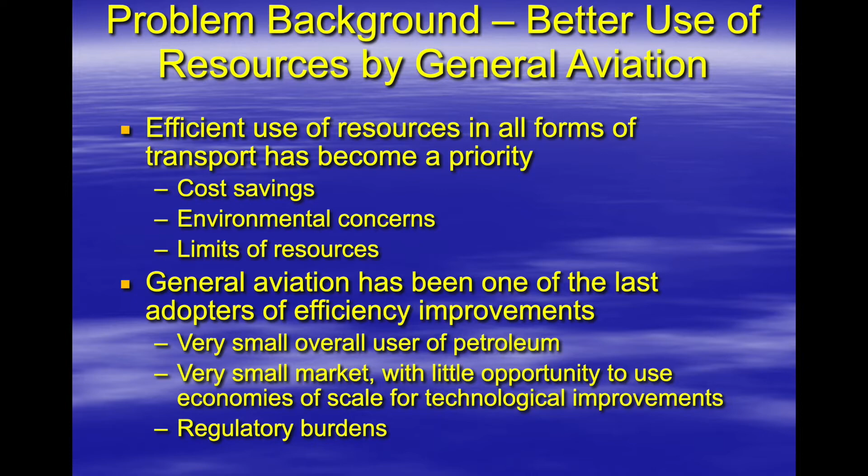Here's the issue I wanted to look at with this project: better use of resources by general aviation. Efficient use of resources in all forms of transportation is a priority, for reasons like cost savings primarily. General aviation, as a rule, hasn't been a big adopter of efficiency improvements. There's not as much of a concern - we really don't use that much petroleum. This market's real small, and there's pretty high regulatory burden, so there's some roadblocks to efficiency.

But there are some more efficient airplane engines being worked on at this time. A couple of them, the diesel engines you're seeing coming out of airplanes like the Diamond Twin Star - that's a compression ignition or diesel engine. The interesting thing on the engines for this particular airplane, they're about 170 horsepower, so they're kind of heavy. They're quite a bit heavier than an O-360. But the real deal on these is the specific fuel consumption, 0.38 pounds per horsepower-hour - that's pretty good compared to a gasoline engine, which is about 0.48, and they can even be higher than that, 0.55 or so.

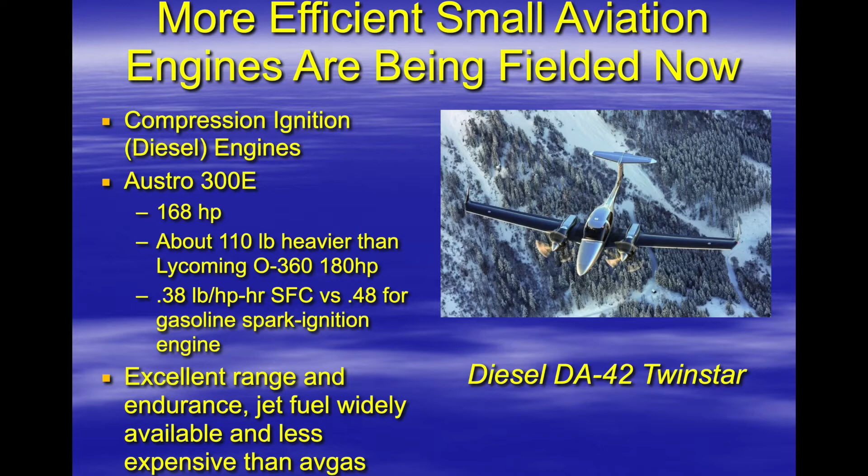Turboprop engines can be more like 0.6 and higher. So these diesels are very frugal, they have real good range, and the jet fuel, if you bought that, is a little bit less expensive than aviation gasoline. So that's a real efficient engine.

And there's some other really neat things coming down the pike - electric engines for airplanes. They'll be fielded in the future, but there are many ongoing efforts to test right now. This picture here is the MagniX E-Caravan. It just flew a few months ago at Moses Lake, Washington - that's the airport there in the background.

The neat thing about these electric motors is they have a very high conversion efficiency for the engine. The amount of energy you're carrying, about 80% of it gets converted into power coming out of the electric motor. But the real deal is that the batteries are still really heavy for the amount of electricity they hold. A gallon of gasoline has about 34 kilowatts of electricity if you do a direct comparison. But batteries that can hold 34 kilowatts of power are about 60 to 80 or 100 pounds or more - it's like 100 pounds a gallon. You get real good conversion efficiency, but the range is not quite there yet.

We're going to see some big improvements on that because the battery industry is extremely competitive, and they're really driving to get the battery energy density up and the weights down, and we're seeing some neat changes in that. So range is still an issue, of course, but they'll eventually get that.

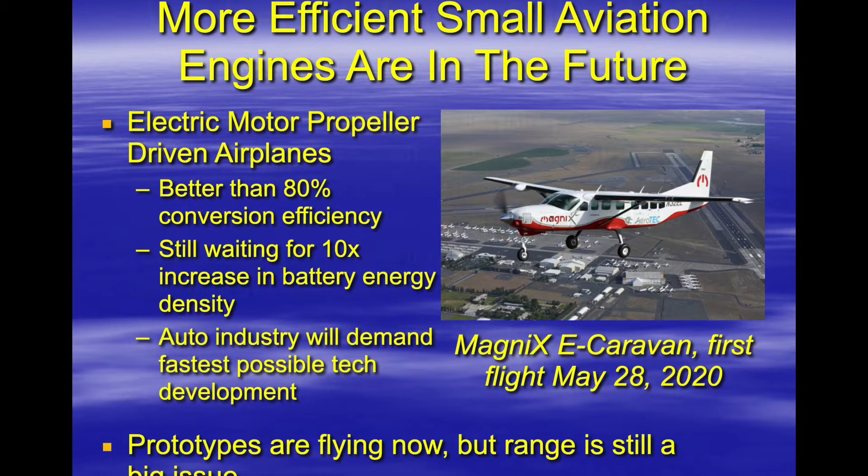But regardless of the propulsion engine type, you still have an engine providing torque into a propeller and providing thrust and power to an airframe. And you really need to be efficient to be able to fly these efficient airplanes - efficient pilots. There are some flying and flight planning techniques that can get better efficiency out of your airplanes in the future, and you can do it right now in your own airplane. It doesn't cost you anything. And here we go - here's how you do it.

So first of all, when you're talking about efficiency, what is that? People tend to think that efficiency is miles per gallon. They really only look at the fuel side, but there's more to it than that. Is speed a factor? That is the question.

And you fly max range, max endurance. Where's the balance there? So there was a great paper done by Gabrielli and von Karman back in the 50s, called 'What Price Speed.' This little graphic here is from that paper. The bottom line is that speed has value.

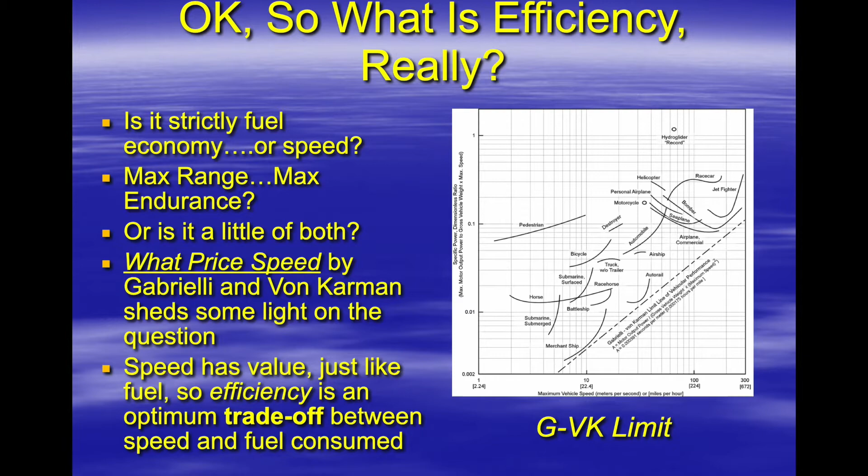Speed has value because of the value of time. So we actually put a value on speed, just like fuel. Efficiency, as opposed to sustainability, is an optimum trade-off between the speed you get and the fuel that you use. Like many engineering things, there are trade-offs there. So that's what efficiency really is.

And using those concepts, a fellow named B.H. Carson published a paper in 1980 called Fuel Efficiency of Small Aircraft. This is an AIAA paper. If you look at the chart here, a lot of you folks have seen this. The upper one is a power versus speed chart, maximum endurance at the bottom of the curve, and maximum range where the curve touches the line coming from the origin. So maximum endurance, maximum range.

Now, if you change the y-axis a little bit here and put that into thrust instead of power, you can do a very similar sort of graphical determination there. Maximum endurance is still at the same speed. Maximum range now actually comes at the bottom of the curve, as you can see. And that tangent line is now called the optimum cruise, and that was called Carson's speed.

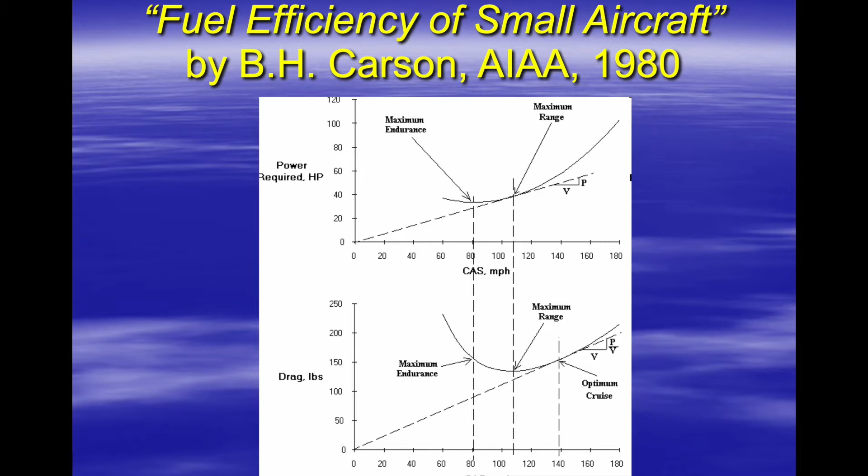There's another look at it here in a little bit larger view, and these numbers will be relevant a little bit later. Again, you have the drag or the thrust there - it's not power on the y-axis, it's thrust as a force, and then your speed. Best rate of climb, roughly, maximum range there, 95 knots or so, and then the Carson speed there, again, is about 123, 124 knots or so. Again, that tangent line goes down to the origin - it's not shown on the graph here because we wanted to zoom in a little bit.

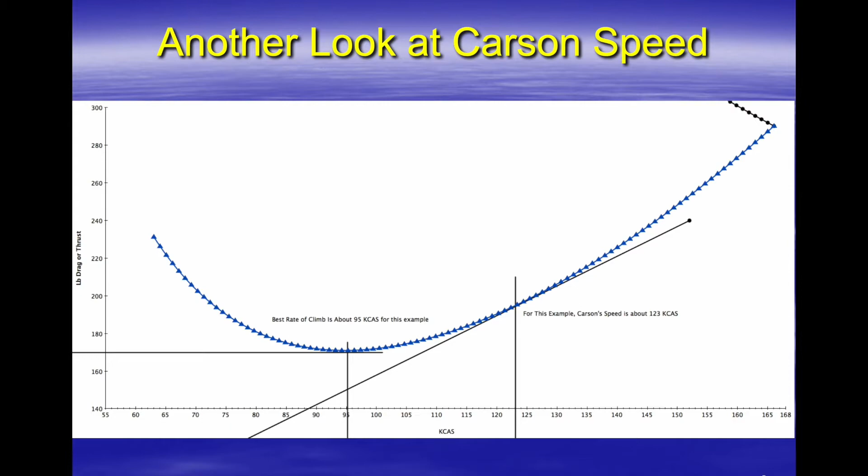So Carson's speed is basically the instantaneous airspeed where the product of your velocity and your miles per gallon are maximized. Again, these are trade-offs. As speed goes up, miles per gallon goes down eventually, at least on the front side of the power curve. And if you maximize that expression - speed times miles per gallon - that's Carson's speed. He called it the least wasteful way of wasting fuel.

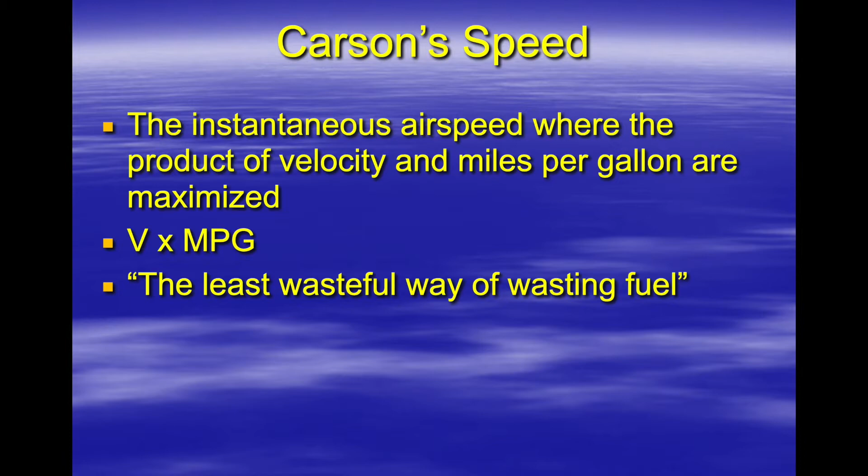There's some other interesting relationships if you do this mathematically, when you raise a value to an exponent. So if you take v to the -1, which would be maximizing miles per gallon divided by velocity, if you maximize that, that's your maximum endurance speed. If you maximize v to the 0, which is 1, which is maximized miles per gallon, that's maximum range, obviously. And that's kind of close to vy, your best rate of climb, roughly.

It's kind of rough - Carson's speed is about 1.3 times your vy speed, roughly. Again, that's v to the 1, or v times miles per gallon - you maximize that. If you maximize the product of velocity squared times miles per gallon, basically that's as fast as you can go, because that square term is very powerful mathematically. So those are the relationships there for those of you who like to see that.

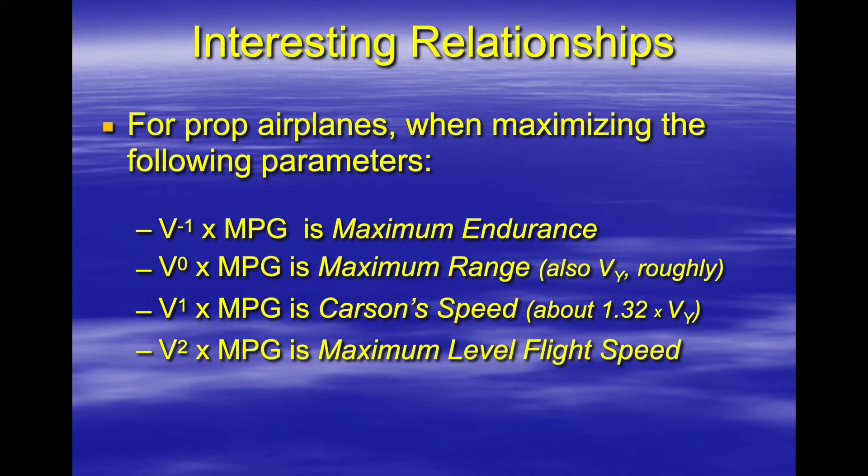But guess what? Most of you probably have never even heard of Carson's speed. And the reason for this is even though this paper was published in 1980, this concept really hasn't caught on. A few people talk about it in some of the various forums. But the real issue here is that when you cruise at this speed, you're only using about maybe 50 to 55% of the power in the airplane. And the winds can overwhelm that for long cross country planning, and your specific fuel consumption.

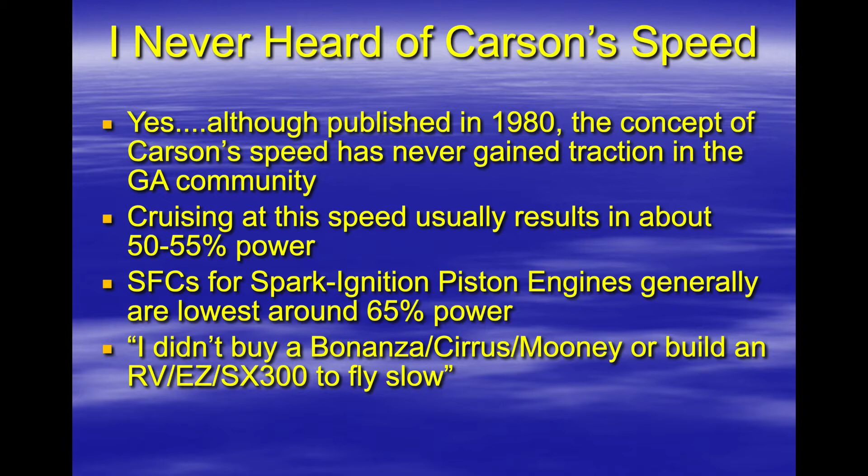Remember, I talked about that earlier - for regular spark ignition piston engines, as opposed to compression engines like diesel, specific fuel consumption is a little bit lower when you're around 65% power. So if you're looking for good specific fuel consumption, again in a no-wind scenario, about 65% power is actually where your best specific fuel consumption comes in. And of course, people will say, I didn't buy a Bonanza or a Cirrus or a Mooney or build an RV or an SX300 or EZ type to go slow. So this really hasn't caught on all that much in the community.

So maybe Carson's speed for cruise isn't the greatest measure of efficiency, and we would want to look at this little exponent thing, this v to the 1 by mpg. If you maximize that, you get basically lower than desired cruise power because it doesn't work well in the real world.

So the CAFE Foundation, the Comparative Aircraft Flight Efficiency Foundation, if you recall, was formed in the early 1980s by Dr. Brien Seeley out in California. They ran a whole series of efficiency air races and did a bunch of other flight research, and they spent a long time thinking about this efficiency issue.

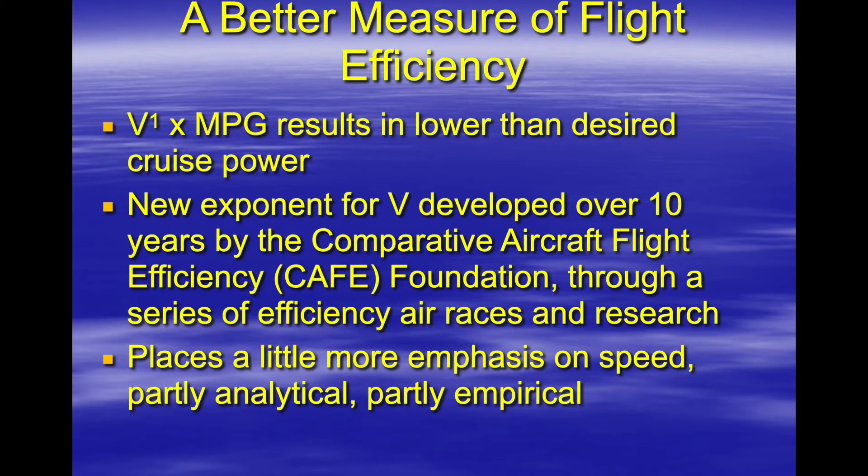And they came up with a different exponent for this velocity term, basically that put a little bit more emphasis on speed. There's a real long derivation of it. I won't bother you with it, but part of this is analytical, part empirical. Anyway, so here it is.

So the CAFE parameter, when you're looking at the efficiency of an airplane, the number you want to maximize is your velocity made good, raised to the 1.3 power, times miles per gallon. So this is like the measurand, the measurand of efficiency. If you can maximize your CAFE parameter, that's your best efficiency.

And the reason you use velocity made good is that's the actual speed that you get between your departure and your destination, because that's really what counts, point to point. Instantaneous velocity is nice for theoretical people, but we're flying airplanes to go from point A to point B a lot of times, and so velocity made good is a better term here, and it allows you to evaluate a flight for non-constant true airspeed, and it also allows you to evaluate a flight for winds.

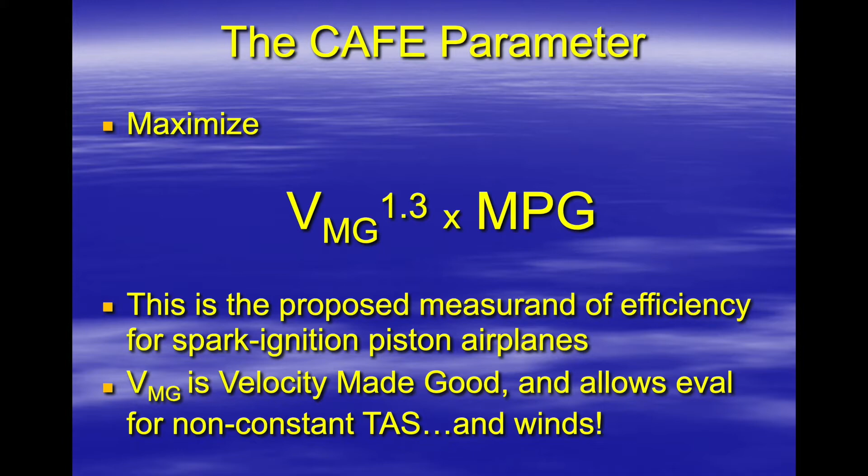Because as I said before, flight planning for your cruise has a huge impact on the overall efficiency of your flight. So Carson's speed still has merit, though, but not really as much as a cruise speed.

My idea to come up with this for my master's thesis started from this book here, Logic of Flight, by Jack Norris. He talked a lot about cruising at Carson speed, and again, we've shown that that's maybe a little bit too slow. He also talked a little bit about climbing at Carson speed, but he said basically climb until the airplane won't climb anymore. And he also didn't discuss really any considerations for cross-country planning with respect to winds.

And there's all that really needs to get into the thought process. So when you're flying at Carson speed, you're using about 50 to 55% power for moving forward, as I said before, but then you use all the rest of your power for climb. And you don't want to fly this 25 squared thing.

People get taught about that. I'm going to show you later on that just really is hard. It hurts your efficiency, and I'll show you that here in a little bit.

So, rather than climbing until the airplane doesn't climb anymore, what I thought I would do is put a performance limit on there and actually make this climb a profile instead of just a constant speed. And this is similar to what we see in some of the larger airplanes.

And the nice thing about changing your profile when the airplane reaches a climb performance limit is that the airplane tells you when you need to make a little change in your climb profile. You don't have to do any computations for different weights, or if it's hot or cold, or if you have winds or any of that sort of thing. That's different from what Norris did, and added quite a bit to the definition.

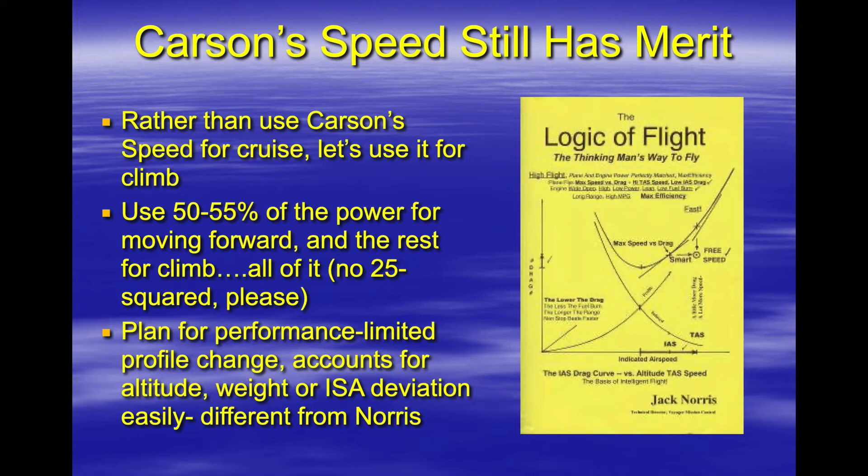So as you recall from your training, there's a couple of FAA-defined V-speeds. VX, of course, is the best angle of climb, and that's the best climb that you get when you're flying your airplane to go forward. And VY is best rate of climb, that's the best climb per unit time. So time, distance based for the first one, time based on for the second one.

So now, logically, we would go to VZ. VZ is currently an unassigned term in FAA vernacular, and so I claimed it in this paper in order to represent the best efficiency of climb. So it's a climb profile, it's not really a constant speed, and here's how you do it.

VZ is about 1.3 times your VY at your maximum continuous rated power. No 25 square, as much as you can get out of the airplane in its certification basis, that's what you use. And now here's where the performance limit comes in. You climb at this speed until the airplane will not climb any faster than 500 feet per minute. So then you change from a constant speed climb to a constant vertical velocity climb.

So you maintain 500 feet per minute climb. While you're doing that, the speed's going to slowly decrease a little bit. And then when the speed gets to whatever your VY speed would be for that altitude, you just maintain your VY and climb at that. So it's a profile instead of a constant speed.

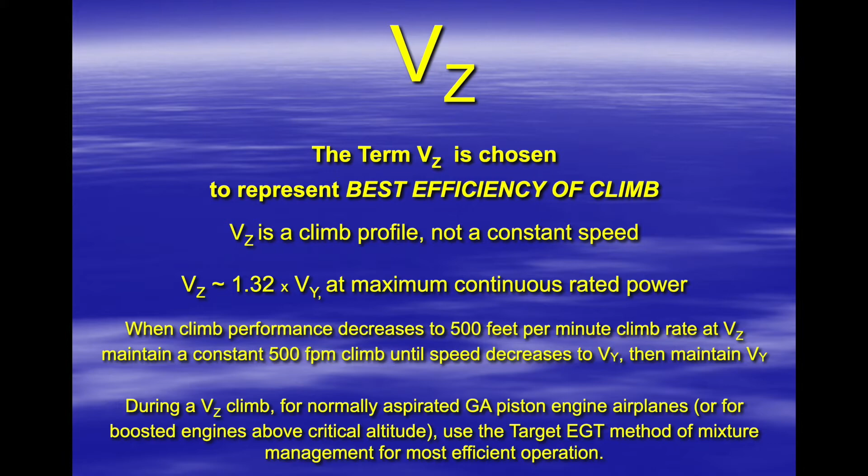But it doesn't really make any difference there. There have to be three things that have to work for this to actually be a useful term. One of them is technically rigorous, so it really is the most efficient climb, and you use the CAFE parameter that I talked about before to evaluate that climb. And then can you define this climb in regulatory language? And then can it really be flown by ordinary pilots?

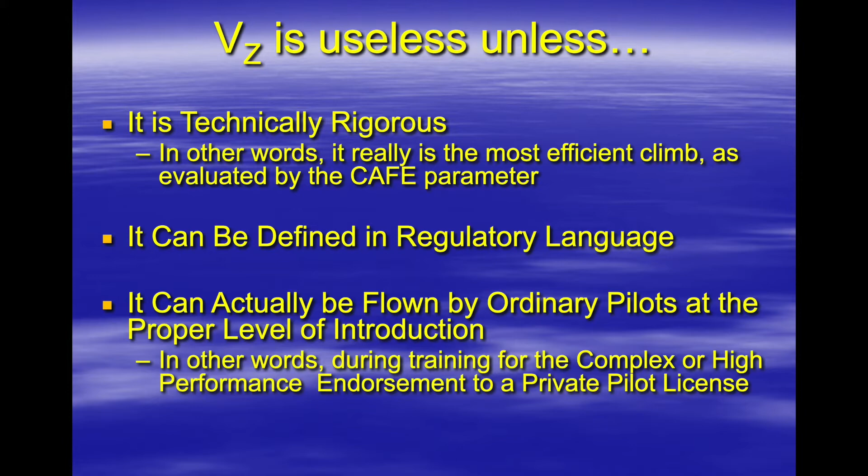The idea for this is you would introduce VZ in flight training at the time that you're going to get your complex or high performance endorsement for a private pilot license. So the difficulty of this particular maneuver has to aim at that population. So that's the idea there. So we need to satisfy all three of these things for this to actually be a viable concept.

And when I was working on this project, this was where I really ran into some problems, because it'd be nice to have a computer model or simulation of airplane performance that could account for this profile change. And the more I looked into it, the more discouraged I got, because it was a very difficult modeling problem. Charts don't really work. Even some spreadsheets that I'd seen didn't really account very well for propeller performance and efficiency.

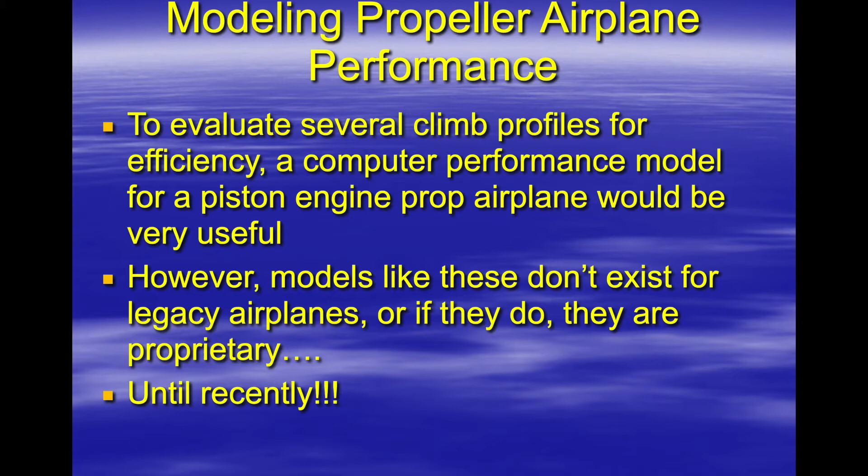So Benchmark was written by Alfred Scott. He's the president of Sequoia Aircraft Company, the guys that came up with the Falco airplane, as well as the Sequoia, which was a kit built similar to the Falco. A couple of consultants on this program, Finn and Dorothy Taylor, are legendary in flight test circles. They were the primary flight leads on Mooney, working with Roy LoPresti back in the 70s, doing flight tests. Huge history. They're giants in the industry.

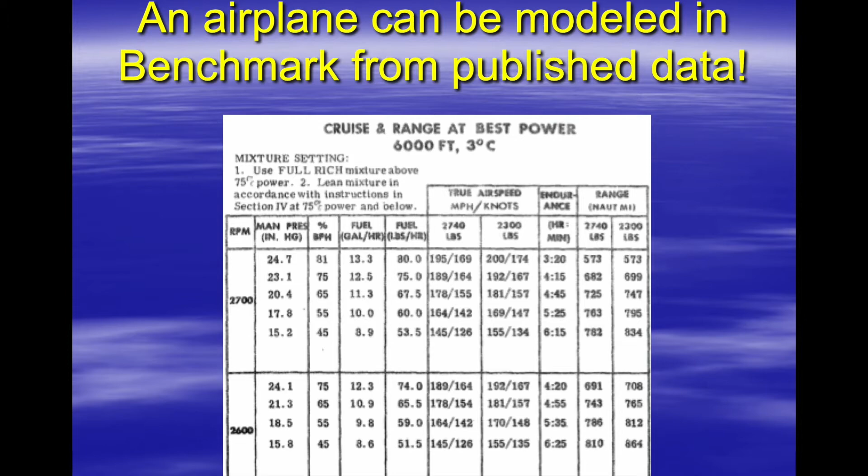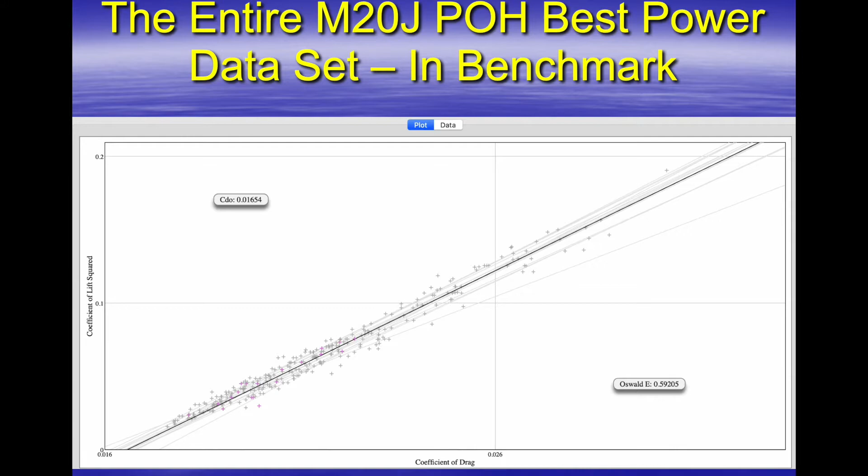So when you look at the numbers here for Mooney, they sort of map over to RV roughly in terms of performance and results. Here's all these numbers, and people normally don't look at all this, but I grabbed all of them. In fact, the entire Pilot Operating Handbook, every line of data, I put into Benchmark, and all those little pluses are a line from the POH that have been put into Benchmark, resulting in a drag and lift curve that you can use to predict performance. The line there is the best fit to the data, and that was a lot of work.

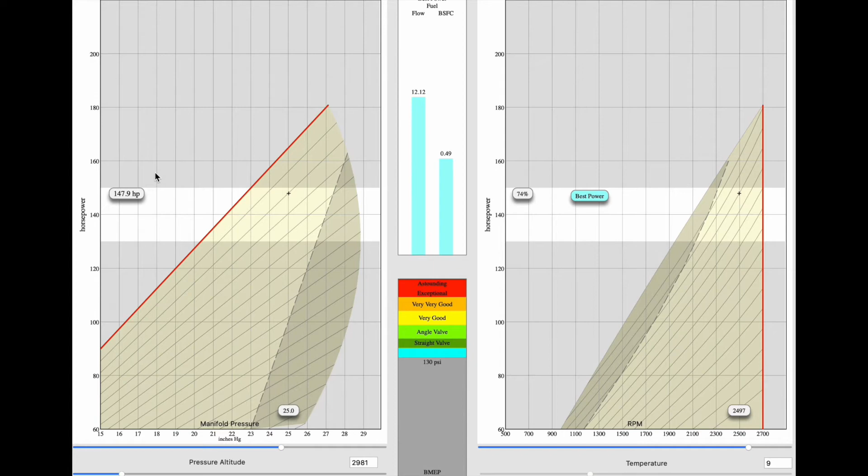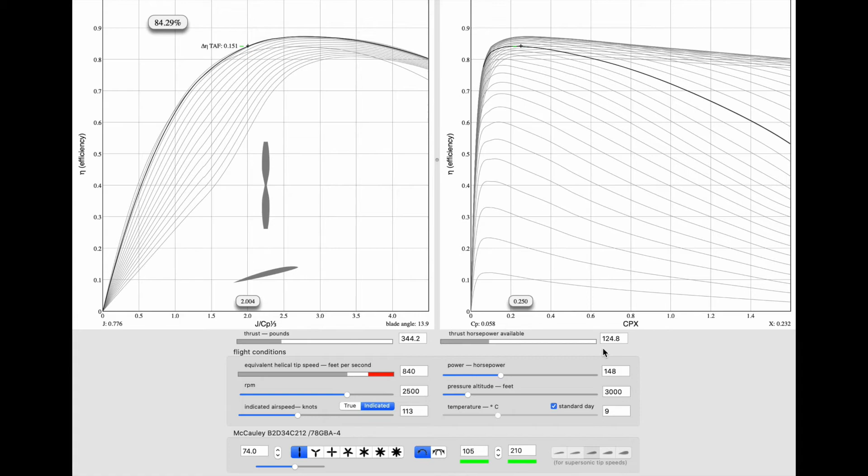And now we're going to see what happens here. At 3,000 feet, there's 2,500 RPM, about 77% efficiency on the prop, but they're at 86 knots. You see now my 200 horsepower motor is only putting 115 horsepower in the prop. If I increase to the VZ profile there, 113 knots, I get a little bit more power, it's 125 or so, but it's not 150. And that's what the guys are seeing climbing out at the higher speed with full power.

So again, 200 horsepower airplane, you're at 3,000 feet climbing. If you're wide open at 2,700 and you're flying a VZ profile, again here for the Mooney, 113 knots calibrated, you're getting 149 horsepower out of the prop. If you're a 25 square guy and you're slowed way down at your VY trying to climb, you're only getting 115 out.

If you speed up a little bit, you're getting about 125 horsepower out, but your rate of climb isn't very good here because, again, you use about 50 to 55% power to move the airplane forward, and at 113 knots, in this case, this would be about 110 to go forward, so you're only climbing with about 15 horsepower. So anyway, basically 25 square, your low altitude climb performance, it just destroys that.

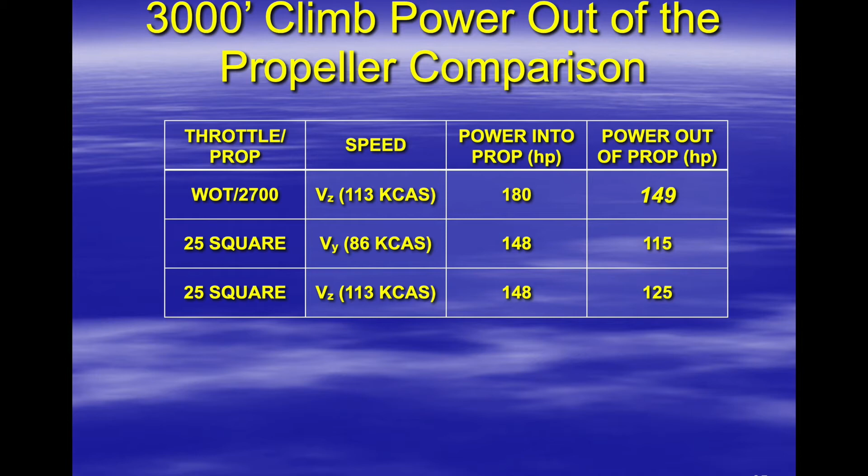And I would advocate, if the airplane certification basis allows, use full power for climb. And if you have trouble with overheating, then you should look at your cooling baffles and how you manipulate your cowl flaps if you got those. At VZ, you shouldn't have any real issues with cooling because you're quite a bit faster than the certified limit. For the experimental guys, you may have to work a little bit. Hopefully you don't see overheating, but this is kind of where you want to go.

So let's look at this. Let's see what this power does to climb performance. And now we're going to look at a chart that Benchmark produces called a climb polar. A lot of people may not have seen this before, but it is in your pilot operating handbooks if you have a certified airplane.

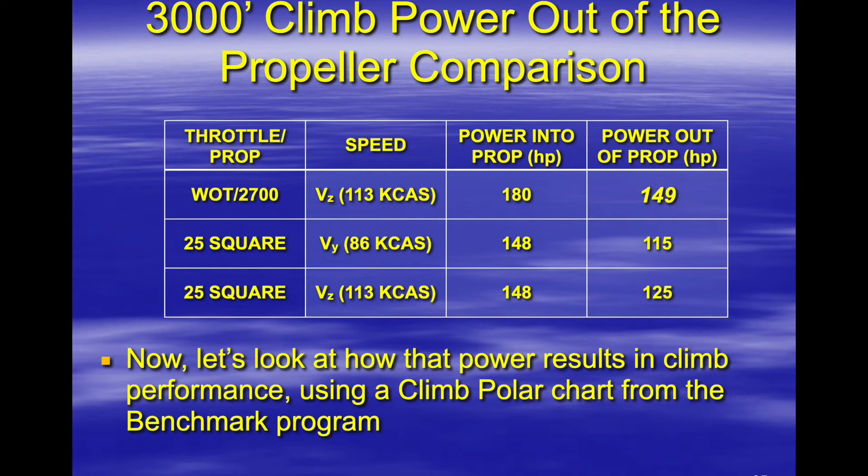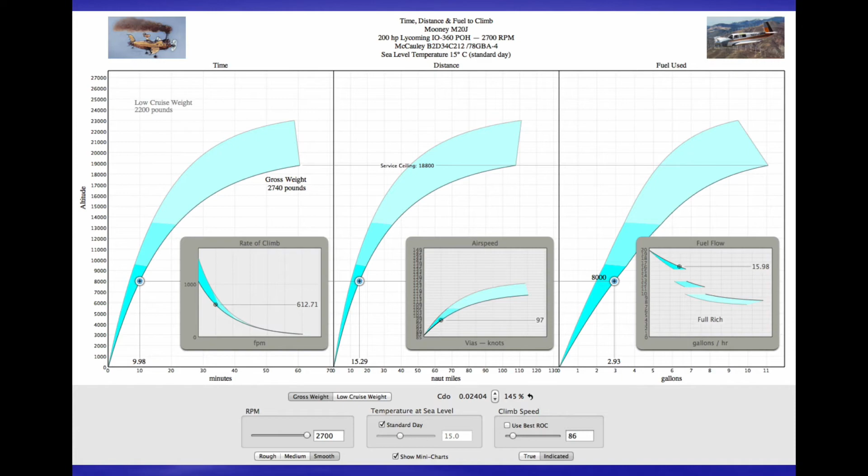There's some mini charts here. This airplane right now is at best rate of climb speed, full power, in a Mooney. If you're at best rate climb speed, or a little faster, at 8,000 feet you can expect to be climbing about 600 feet per minute. This particular data would be discernible from the pilot operating handbook, but it only gives you this one speed.

It doesn't let you really change any of the other parameters. This is a close-up of the time to climb chart. Again, 10 minutes to 8,000 feet, and your rate of climb when you get there is about 600 feet per minute, so you're still climbing a little bit. The lower curve is at maximum gross weight, and the upper curve is when you're lighter. You can obviously climb faster, so it's a different curve, and all your different weights lie in between in that blue arc.

Now, I was curious how accurate Benchmark was with respect to the published data for the Mooney. So what I did is I superimposed this chart at the same scale to the chart in the Mooney Pilot Operating Handbook. As you can see, it's almost an exact match. If you can see underneath there the chart from the Pilot Operating Handbook, it starts to diverge a little bit above 13,000 feet at gross weight.

The line for the Mooney there from the book is 2,740 pounds, the upper one, and then the big line above that's 2,200. So you can kind of see where those would fan out. This tells me that the benchmark was pretty darn accurate and does match the published data for that model.

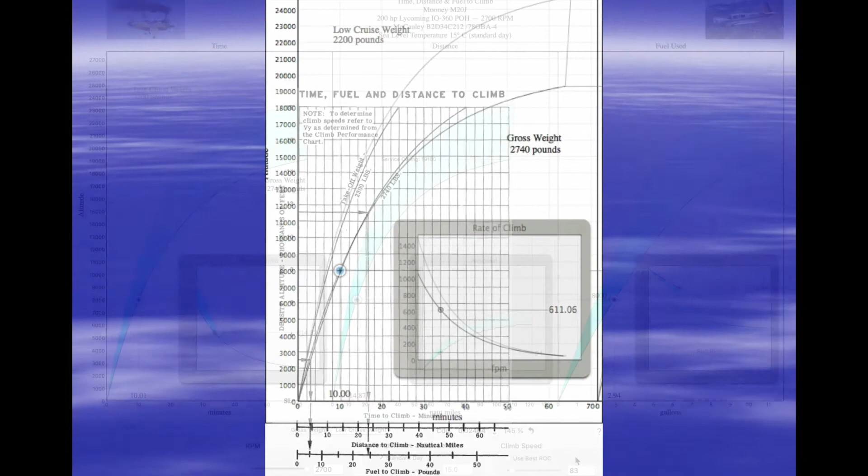But the cool thing about a model versus a chart is then you can manipulate it, just like we were flying the engine and the propeller earlier. So that's what we're going to do now. And this is the big question.

If I increase my speed from 83 or 86 knots, again VY in this Mooney, and go faster, what altitude am I going to be at on a standard day, at gross weight, when I have to go to 500 feet per minute? So that's the prediction: faster speed, 500 foot per minute climb, and where does that happen? This program just makes it easy as can be.

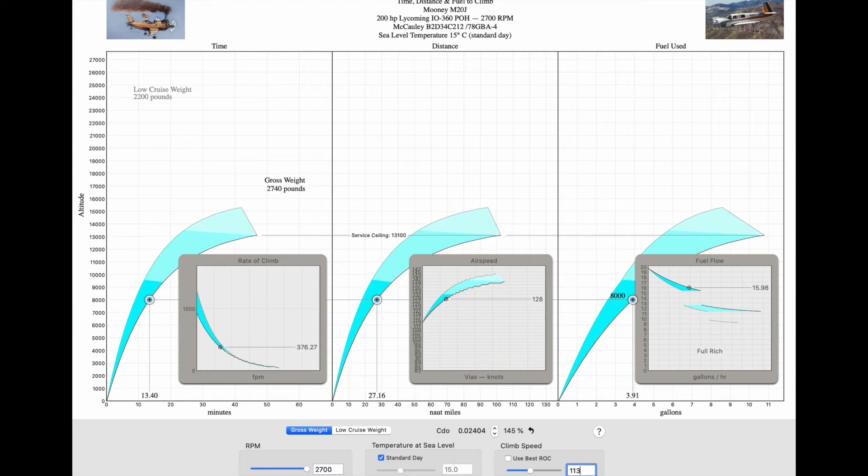This is a really huge calculation, so we smooth it out after we make these changes. I'm a little bit low on the VVI, so I should lower my altitude here to predict where I'm going to transition from climbing at 113 knots to climbing at 500 feet per minute. In this case, you can see it's right around 6,000 feet or so when I do this transition. So that's a big deal there. Again, you think about a constant airspeed climb, then a constant VVI climb when you see 500 feet per minute.

Now, the neat thing about this is I don't have to do any flight tests for the calculations in order to prove that I have the efficiency from this profile, because I can do this by model. I can run all kinds of predictions with this model just by manipulating these charts. This particular capability, what you see right here, never existed before this project. No one had ever done it before. In fact, it wasn't even in Benchmark, and I worked extensively with Alfred Scott to develop this capability in this program, and it's really cool.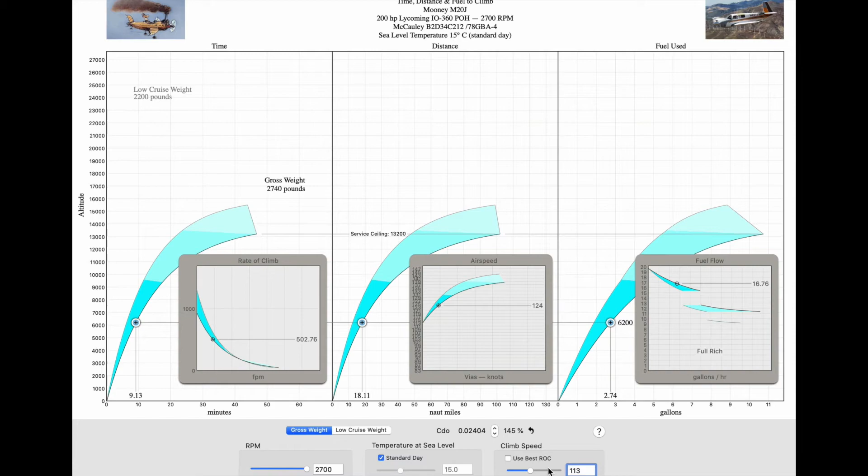So basically then what I could do is figure out time, distance, and fuel using a profile with this model, and then start looking at baselines and see how sensitive this technique might be for actual pilots to fly. So you run the profiles, figure out how far you go, how fast you got there, and how much gas you used, and then use that to compute the CAFE parameter.

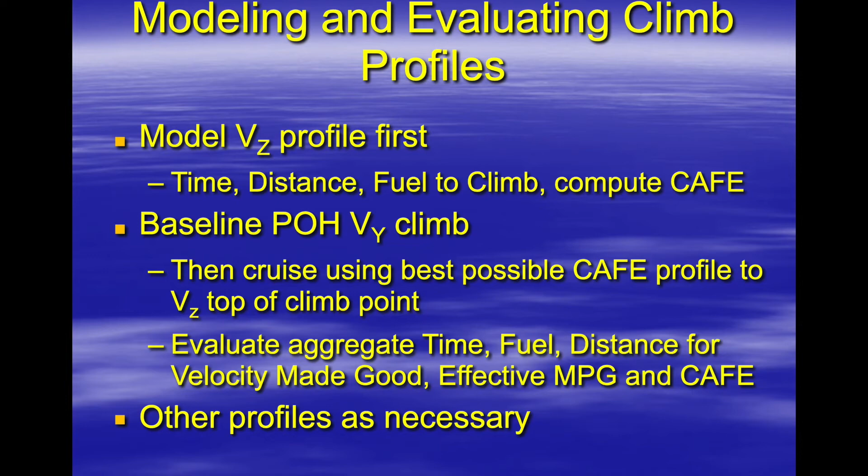This little chart here is a bit of an eye chart, but it's really important. I knew once I ran these numbers that this thing was going to be good. It really is the most efficient profile. I showed it in the model, and that was the first check mark in whether or not VZ was actually useful. The top line shows VZ speed climbing to 8,000 feet.

We used target EGT to manage the mixture for this profile, from near sea level to 8,000 feet. Actually, this is a model of a 0 to 8,000 foot climb. Standard day, gross weight, Mooney, 0 to 8,000 feet.

It takes 12.8 minutes to get to 8,000 feet. You go 25.5 miles downrange. You use 3.4 gallons of gas. There's your nautical miles per gallon. And remember, the CAFE parameter is the velocity made good times the MPG, in this case nautical miles per gallon. So that's the score, 3812.1.

Now, if you follow the POH, you fly at VY at full rich. Take you 10 minutes, remember that? We saw that. 10 minutes to get up there, 2.7 gallons, and you go downrange 14 miles. But you're only 14 miles, so you need to get back to the same point in the sky as the VZ climb, so you just cruise down there.

With this second line, you're actually maximizing the amount of time. You're at 65% cruise, and you would think that would maximize the CAFE score, but it doesn't, because the climb is such a powerful contributor. So you can see that lower score there, full rich, and we're going to start getting progressively more efficient.

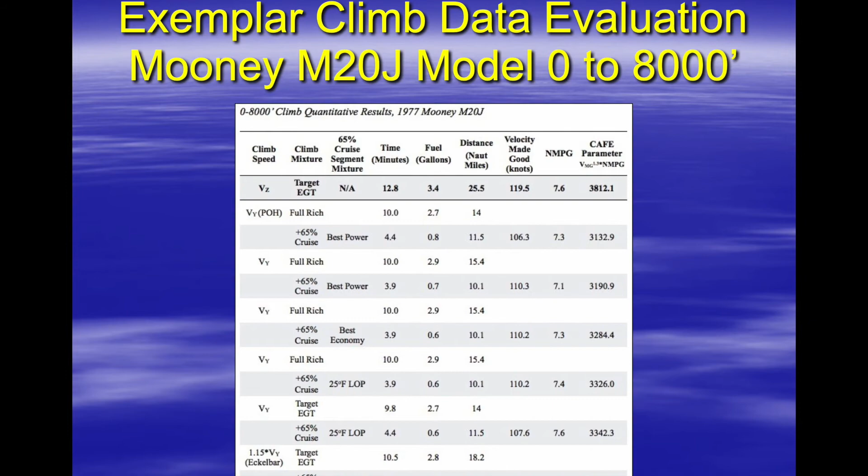In fact, if you happen to fly that speed pretty close to what you'd expect a student getting their complex rating to fly to, which would be plus 10 and minus 5 knots - that's in the ACS, the Airman Certification Standards - even plus 10 or minus 5, you'll still get the results you're looking for. That's really neat, because now it can be acceptable in a regulatory sense, since you can still get really good results and still apply it to that pilot population.

But the next real question is: is this profile really flyable? You don't want golden hand test pilots to be the only ones able to fly this thing. It's got to be flown by a private pilot going for a complex or high performance rating. So the idea here is, once I got all the models done and the regulatory stuff, is to actually go do a flight test. The flight test would anecdotally gather some performance data, but the real thing is more of a flying qualities evaluation - is it flyable, what's the workload, is this really flyable by an ordinary pilot with ordinary skill?

The Cooper-Harper rating scale is a flight test device used - actually, it's a practice used to evaluate flying qualities. In a nutshell, what you do is you have a task, and if you're really good at it, you can meet a desired criteria for performance or accomplishment of the task.

And if it's adequate, that means it's kind of hard to do, but guys can do it. If it's completely unsatisfactory, you can't do it at all - those are the lower scores. So a 10 is the almost impossible rating, a 3 is pretty good, and when you get to 4 to 6 it's not quite so great. But the adequate criterion basically is, can you maintain your speed plus 10 and minus 5 knots when you're flying your VZ profile? And that points exactly to the airman certification standards. So is that flyable? Can you maintain that speed?

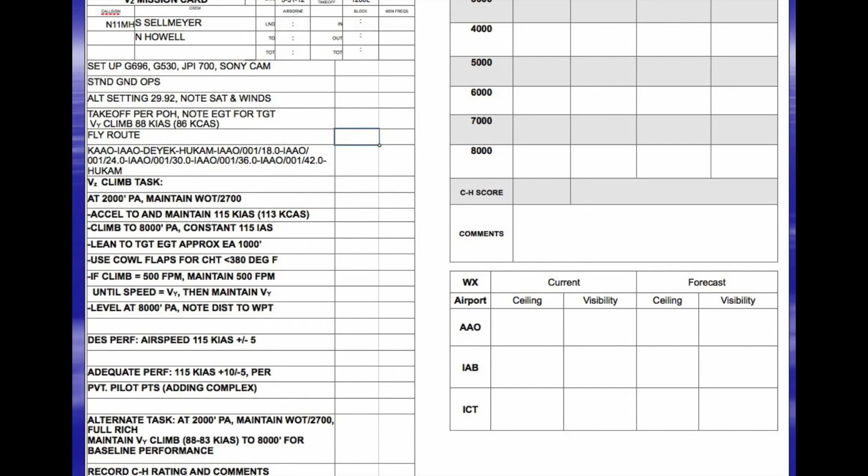Okay, and these are the test results. This is actually using Google Earth, and what you're seeing is the 2 climbs superimposed on one another - one is a VY climb and one's VZ. This is coming from Wichita, Jabara Airport, northbound. There's a real strong headwind there. It was kind of hot, and the airplane was a little bit lighter, so you'll see a change in the CAFE scores.

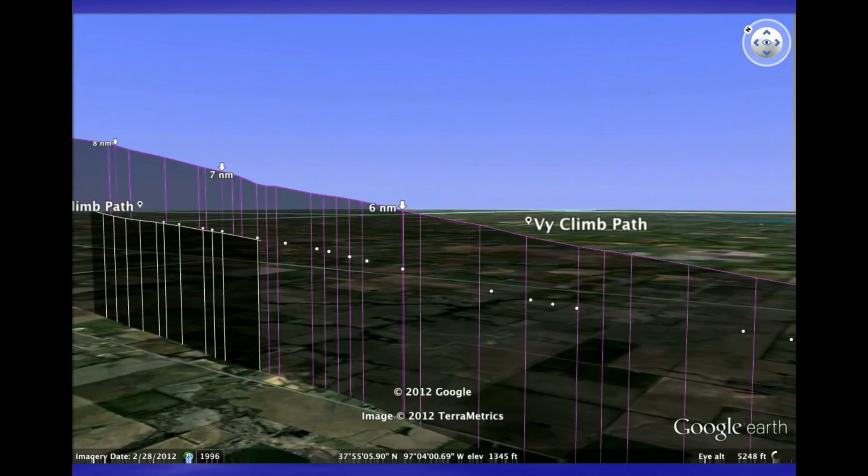But I want you to now see this visualization of what this looks like. There's the takeoff, and the purple track is the VY climb, and the white track is the Z - you actually see it labeled there. So the upper one is the climb path, climbing at VY, and the little dotted dots below, that's where the VZ path was. He flew the same path on the same day with about the same weight, and there you can see the VZ climb.

Now the airplane on this test day reached its 8,000 feet about 12 miles from takeoff. Then cruising using the VZ profile, you actually got to 8,000 feet 19 miles away instead. So that's basically how fast and how much gas did it take you to get to this same point in the sky - that was what the evaluation was from the performance. Again that was as a sideline - I wanted to find out how hard this thing was to fly.

So this video here is the test subject flying along, and we're just past about 6,500 feet. The rate of climb has just dropped to 500, so we're at the transition point from the speed to the VVI. He's managing his cowl flaps there, looking at his EGT for target EGT. I was asking him, was this a difficult thing to do? He didn't seem to think it was. You'll see the airspeed now starting to decrease a little bit, so he's flying this constant 500 foot per minute climb, with another 1,000 feet to go.

So we got through the profile change - you can see there's the target EGT at about 1,300, and we're climbing out. There you'll see on that Garmin 530 the path, so we could repeat the two paths and get that visualization on Google Earth that you saw earlier.

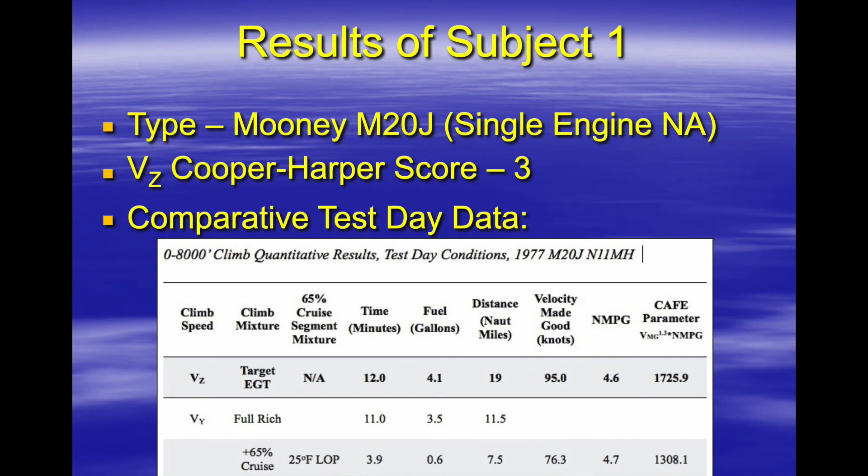We did run the numbers here. You'll see those CAFE numbers a little lower, primarily because of the headwind we're climbing into. But the real interesting thing is it took about the same amount of gas to get to that 19-mile point, but using VZ you got there at 95 knots, velocity made good with the winds, versus VY at about 76. Same point in the sky, same gas, 20 knots faster. I call that a win.

The results are promising. We had ratings of 3 from 3 different pilots flying 3 different types of Mooneys, and I used this technique personally in our Mooney and the Aerostar 601P. I actually rated it as a 2 in the Aerostar because the airplane's so easy to manage from a power standpoint. A lot of the comments I got from pilots was that it's really no harder to fly than a VY climb. It's really easy to see the transition to vertical velocity when the performance drops down. I was a little worried about that, but they said it was really easy to see. And of course, less rudder needed on the climb out for side wash, that sort of thing. So people seem to like that.

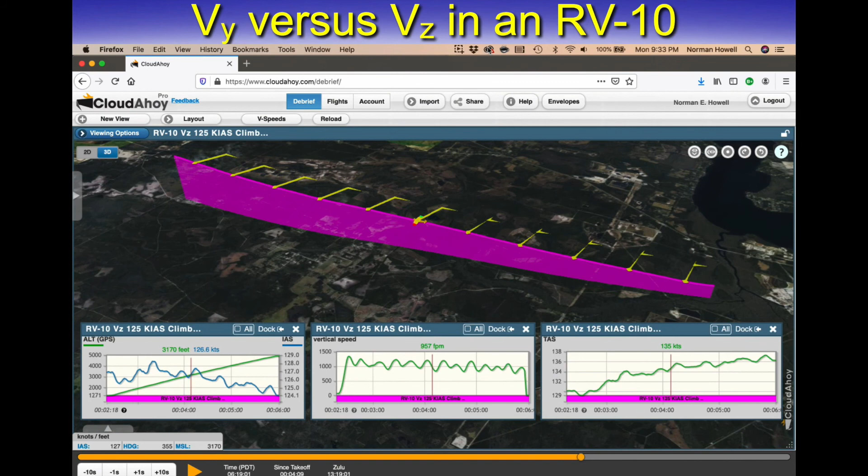Now this is what the VZ climb looks like. Similar to what you saw with the Mooney, you get downrange a little bit faster. The interesting thing to look at is the speed versus performance trade-off, partly because propeller efficiency is quite a bit better as you roll the speed up. Here the VZ climb is now 125 knots, and the average vertical speed for this 3-minute segment was 950 feet per minute. So you gave up maybe 200 feet per minute average climb, but look at this true airspeed — you give up very, very little to get that.

Let me roll this and let her go. Now we're climbing there, you see the little airplane climbing, and the vertical velocity is around 900 or so. But look at this true airspeed now — he's holding 125 indicated, and you're doing 135 knots going down the road, coming up to even higher, 136, 137. Very little loss in climb capability, and you're really getting down the road.

So that was kind of neat to see using CloudAhoy. I love this program, everybody should have it. You could do all kinds of flight tests with this — its potential really hasn't been fully explored. There's a whole magazine series you probably could write with this program for Phase 1 flight test.

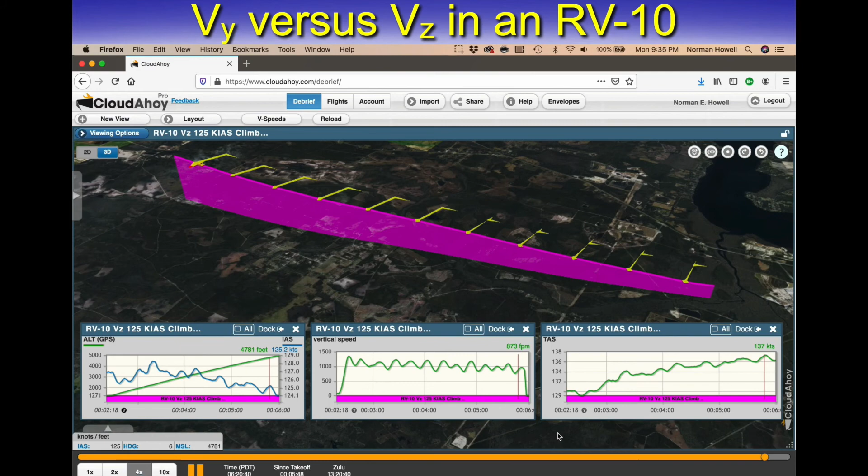This is my Lancair Legacy, or SX300 simulator for you folks in the experimental world. It's got pretty good performance. This is a VZ climb from CloudAhoy, typical of what I do in this airplane. Its best rate of climb is about 115 knots indicated, so VZ is 154, and I fly this a lot.

I publish this on the Aerostar magazine and forum, and there are lots of people in the Aerostar community now using this climb profile. Because the airplane is turbo-normalized, it doesn't run out of climb performance as fast, so you can get to a really long altitude and a long way downrange as you climb. This airplane, a 601P, is really happy at 19,000 feet, so that's the target altitude I use for flight planning, varying from there.

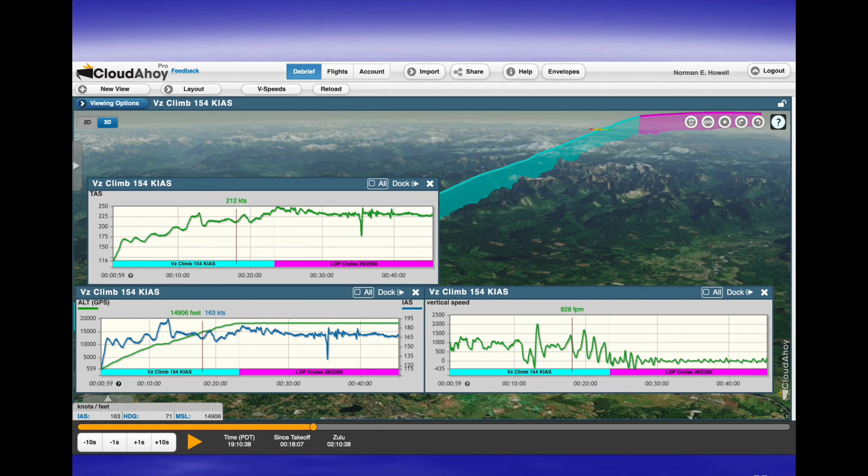So it's a 154 knot climb, and then I go to an LOP cruise. The cruise numbers for this airplane: 26 inches, 2,200 RPM, 26 gallons an hour total fuel flow, 25 degrees lean of peak, and about 215 knots, or 210 to 215 depending on the temps. The astounding thing is this really high true airspeed, and it really picks up as you get to altitude in the turbo airplanes because the difference between indicated and true becomes really stark. It really pays off in these climbs using VZ for the higher performance.

This is the AirVenture Cup air race from 2014. I wound up much higher than everybody else in the race — I think a few people listening to this were probably in that race. There's a little bit of tailwind here. This is an older flight, so the wind barbs are no longer available on CloudAhoy.

So as you look at the charts on the lower side, you'll see that the indicated airspeeds and the true airspeeds, which need the winds to drive them, are not really accurate. This airplane won't go 275 knots in level flight. It's more like full power, about 250 knots or so. And I was trying to do a pretty good job holding the indicated there.

You see the indicated showing higher as I let this play. But there she goes. You can see the charts move there. That 160 indicated is actually 150. Had a little bit of a tailwind climbing out, but that's not accounted for. That vertical velocity is accurate, and this ground speed is accurate. So you can see the ground speed picking up, about 10 knots of tailwind.

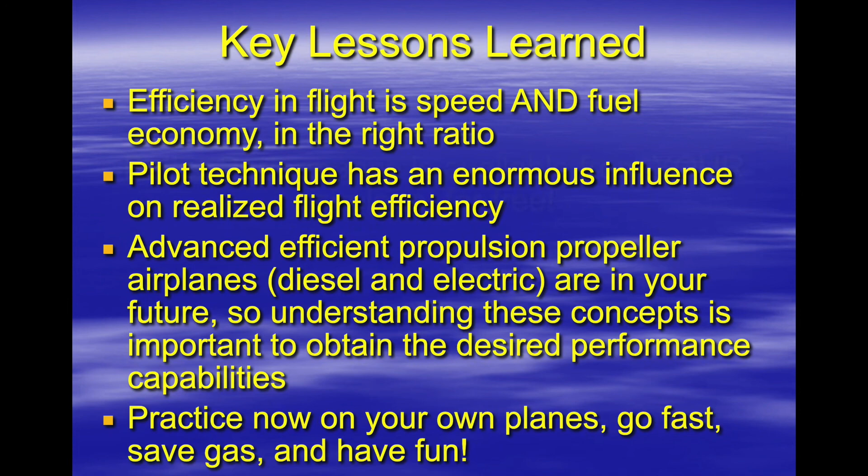But you can practice right now. It doesn't cost you anything to do this. You can go fast, save gas, and have some fun. So what I say here is that better performance is available from your airplane right now for free. The only thing you need to do is STC your brain.